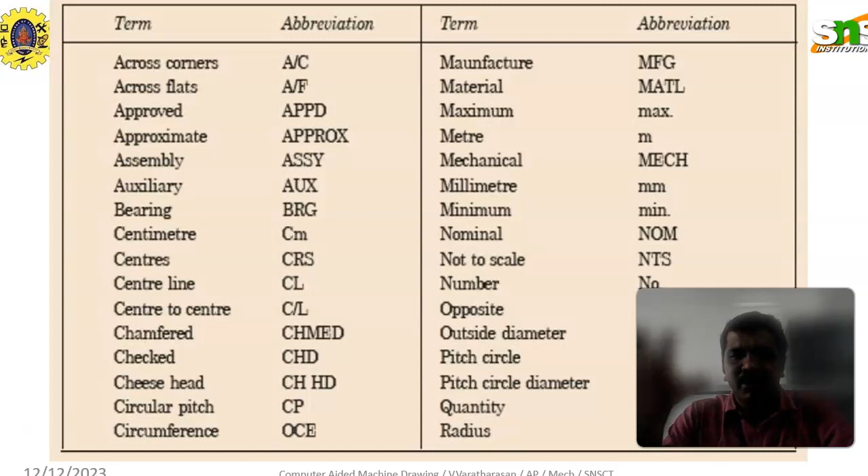Moreover, the scale factor value and the symbolic representation of the drawing, whether it is first angle projection or third angle projection, are pointed out in the title block. The title block is a medium of representation of the particular diagram. Apart from the title block, in the detailed view of the drawings we also use these abbreviations.

Here, based on the technical terms, the abbreviations are represented in this slide. We will see one by one. Across corners, the abbreviation is AC. Across flats, approved, approximate, assembly, auxiliary, bearing BRG, centimeter CM, centers CRS, center line CL, center to center, chamfered CHMED, checked CHD, and cheese.

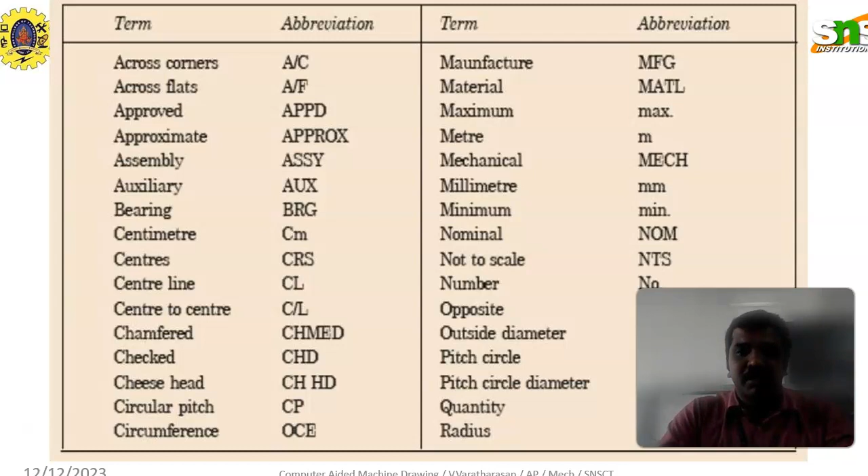The term checked is used in the title block. Verified, checked, and approved are title block abbreviations: APPD means approved, CHD means checked. Likewise, circular pitch, circumference, manufacture, material, maximum, meter, mechanical, millimeter, minimum, nominal, not to scale, number, opposite, outside diameter, pitch circle diameter, quantity, radius.

Continued, counter bore, countersunk, cylinder, diameter, diametral pitch, dimension, drawing, equispaced, external, figure, general, ground level, ground, hexagonal, inspection, inside diameter, internal, left hand, machine, radius, reference, required, right hand, round, screw, serial number, specification, sphere, spherical, spot face, square, symmetrical, thick, thread, through, tolerance, typical, undercut, and weight. These are the things that will be used.

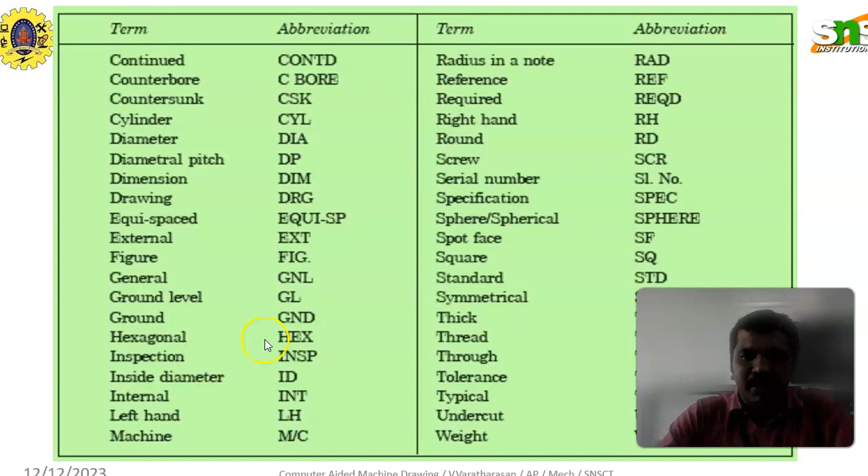Likewise, there are abbreviations based on the material also. Aluminium means AL. Likewise brass, bronze, cast iron, cast steel. The diagram is a representation of the product, but in which material it is manufactured is very important information. Based upon the material selection, the remaining processes of manufacturing and production are carried out; material selection is a very important factor in production.

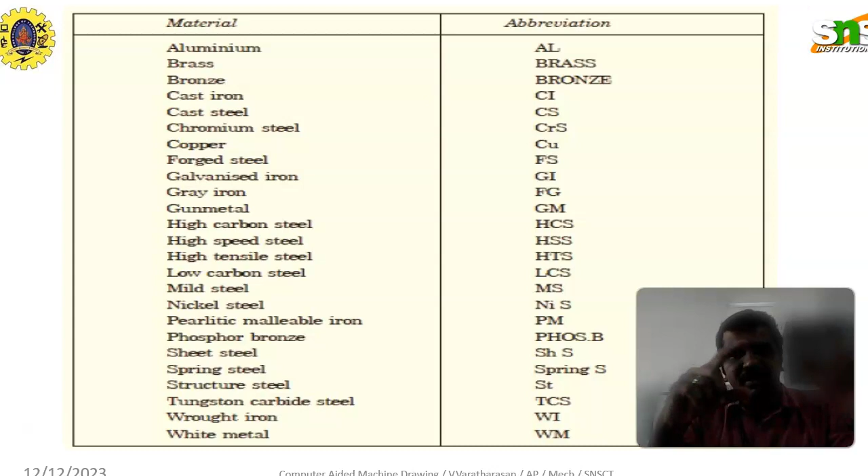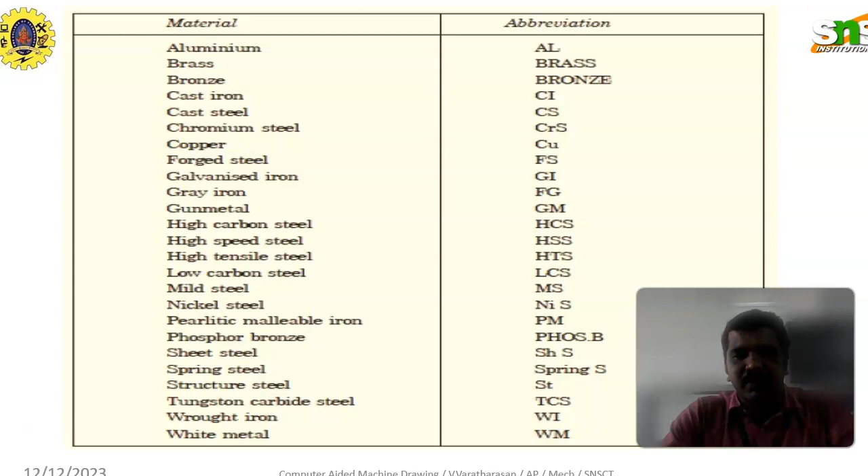So the material can also be represented in the drawing sheet, and each material has a symbolic representation. Cast steel, chromium steel, copper, forged steel, galvanized iron, gray iron, gunmetal, high carbon steel, high speed steel, high tensile steel, low carbon steel, mild steel MS, nickel steel, pearlitic malleable iron, phosphor bronze, sheet steel, spring steel, structural steel, tungsten carbide steel, wrought iron, white metal. These are the abbreviations we are using.

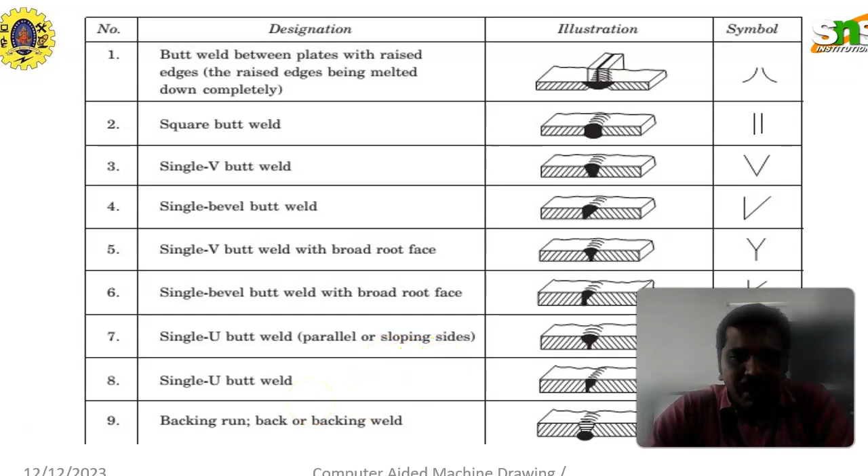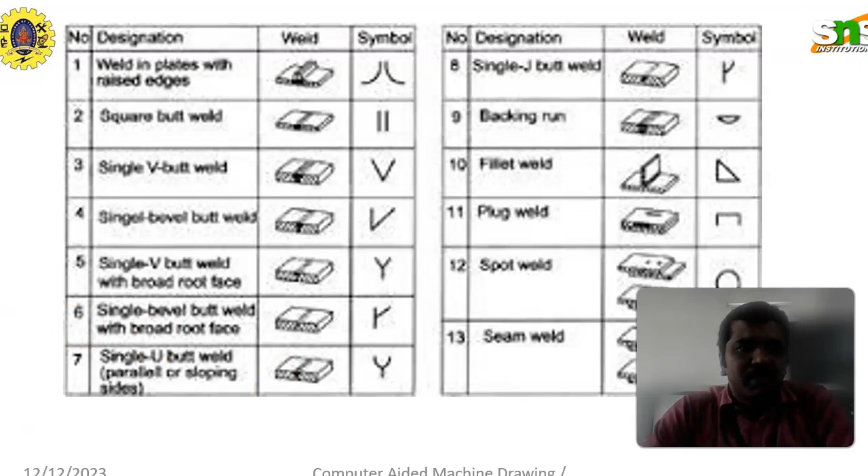Like the abbreviations, symbolic representation is also very important in drawings. Single V butt weld, single bevel butt weld, single V butt weld with broad root face, single bevel butt weld with broad root face, single U butt weld with parallel or sloping sides, single J butt weld, backing run or backing weld, fillet weld, plug or slot weld, spot weld, seam weld. These are the different illustrations and symbolic representations, with reference to V. Gopalakrishnan.